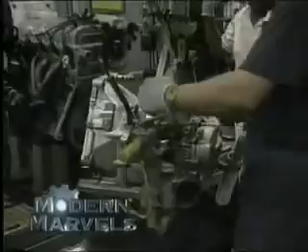Eles movimentam nossas vidas. De carros a cortadores de grama, de navios a locomotivas. Eles transformaram o mundo e nos levaram à Lua. Hoje, em Maravilhas Modernas, motores.

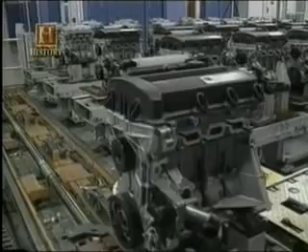Maravilhas Modernas. O motor é o grande símbolo da engenhosidade humana. Há 3 séculos, estas máquinas são a expressão definitiva de nosso desejo por excelência tecnológica. E através de muitas gerações de progressos científicos, elas tiveram um profundo efeito sobre a forma como viajamos e trabalhamos.

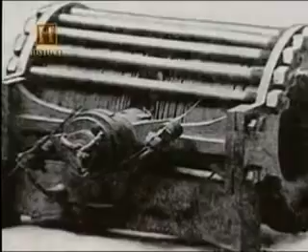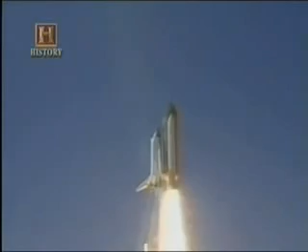Motores a vapor substituíram o cavalo. Motores elétricos e a gasolina substituíram o motor a vapor. Então, o motor a jato e o foguete levaram essa tecnologia a um nível mais alto. Agora, a microtecnologia está provando que menos é mais.

Esta marcha através dos séculos começou quando o motor a vapor deu início à Revolução Industrial. Ele libertou a humanidade da dependência de fontes primárias de energia, como o vento, a água e a tração animal. Motores a vapor movimentavam máquinas, trens, navios, tratores e automóveis.

Before steam, mostly we used animals as our mode of transportation. When steam came along, of course, we can move more material faster and more reliably than we could with animals. And so that was a big transformation. People became less tied to being in small cities. They could live out in the farm and still be connected, if you will, to the cities.

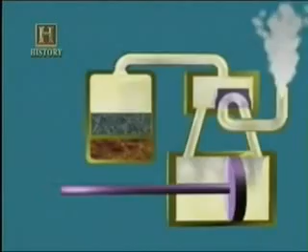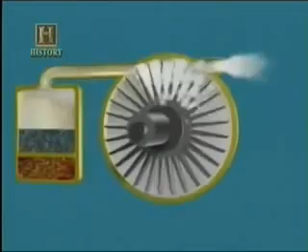Em um motor de pistão a vapor, o vapor entra em um cilindro e empurra o pistão. Depois entra pela outra ponta, empurrando-o de volta. O vapor vem de uma caldeira, um recipiente com água que é aquecido pela queima de combustíveis como madeira, carvão, petróleo ou gás natural. Um motor de turbina a vapor é como um moinho, mas as pás são giradas por vapor pressurizado e não pelo vento.

Até hoje, turbinas a vapor são muito usadas. Na verdade, elas geram a maior parte da nossa eletricidade.

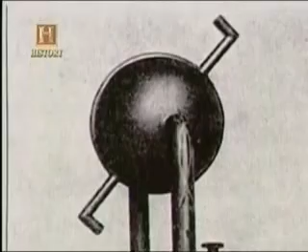O cientista grego Heron, de Alexandria, construiu o primeiro motor a vapor há cerca de 2000 anos. Era apenas uma bola de metal com 2 bicos, parecidos com os de uma chaleira. Quando o vapor era inserido na bola, ela girava. Heron o colocou em exibição no Serapeum, um museu de Alexandria, onde entreteve visitantes por anos, embora fosse considerado apenas um brinquedo interessante.

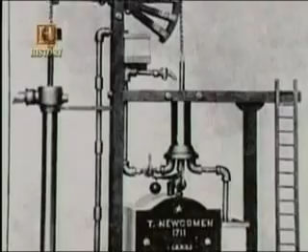Em 1705, 2 engenheiros ingleses, Thomas Savery e Thomas Newcomen, produziram um grande motor a vapor usado para drenar minas de carvão inundadas. O motor usava um pistão que se movimentava dentro de um tubo chamado de cilindro.

These early engines didn't have the gearing that could convert reciprocal motion into circular machine driving motion. That didn't happen until the 1770s when James Watt developed what is probably the most famous steam engine of the 18th century.

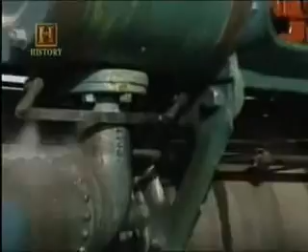James Watt, um professor da Universidade de Glasgow, aprimorou o motor a vapor, tornando-o mais eficiente na movimentação de máquinas. Seu regulador com bolas giratórias se expandia com o aumento da velocidade. A força centrífuga separava as bolas de ferro, fechando uma válvula e reduzindo a velocidade do motor.

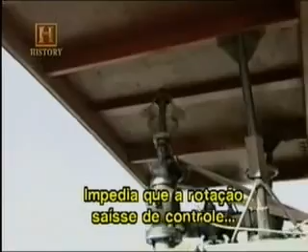And as it spread out, it would control the movement of steam into the cylinder. And that was a very efficient device to keep it from revving out of control, but more importantly, to keep it in a steady, regular, uniform motion.

Em 1800, havia mais de 1.500 motores a vapor funcionando na Europa e nos Estados Unidos. Além de drenar água das minas, também movimentavam máquinas nas fábricas.

Britain was the first nation in the West and in the world really to become industrialized, and so much of what was going on there was built around the advent of steam power.

Em 1830, navios a vapor atravessavam o Atlântico regularmente. Os primeiros navios a vapor não eram muito diferentes dos veleiros da época. Ainda possuíam mastros e velas, mas a grande diferença era a roda de pás no meio do casco. Girada por um motor a vapor, ela fornecia energia extra para o navio.

Both steamboats, then later railroads, dramatically shortened the time that people could traverse long distances. The American politician John C. Calhoun often used the expression about conquering space. And basically that's what these machines did, was that they helped to conquer space. They shortened distances between two places.

Isso era ainda mais verdadeiro no caso das locomotivas que cruzavam o oeste americano no século XIX.

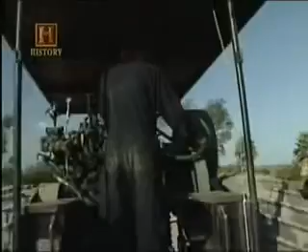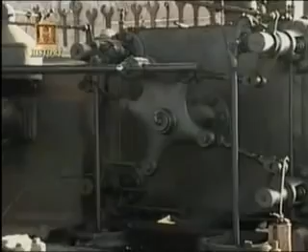Em meados do século XIX, um americano chamado George Corliss desenvolveu o motor a vapor mais importante desde James Watt. Seu novo sistema regulador permitia que o motor funcionasse com mais constância, tornando-o ideal para a indústria têxtil.

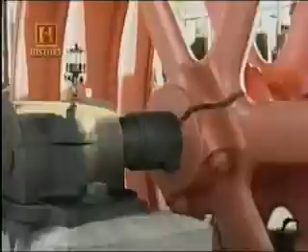O enorme volante pesa 9.500 quilos e o motor inteiro tem 45 toneladas. Este motor de 300 cavalos funcionou até 1978, quando a fábrica de açúcar Holly, em Santa Ana, foi demolida.

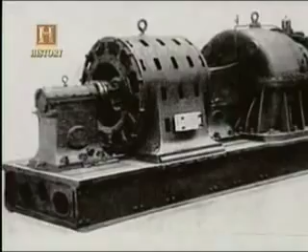Um novo tipo de motor a vapor, sem pistões, foi criado no fim do século XIX por 2 engenheiros, o inglês Charles Parsons e o sueco Carl de Laval. É o único motor a vapor amplamente utilizado nos dias de hoje. A turbina a vapor, que usa vapor pressurizado para girar as pás de um rotor, é mais compacta do que o motor de pistão e suporta temperaturas mais altas e maior expansão do vapor. Isso significa mais potência. No início do século XX, muitos transatlânticos eram movidos a turbina.

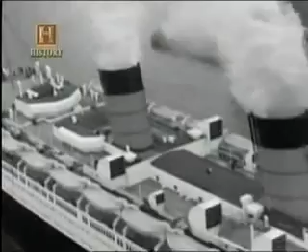Em 1920, ela havia eliminado o motor de pistão nas embarcações maiores. Todos os grandes navios, do Queen Mary de 1934 ao United States de 1951, eram movidos por turbinas a vapor. Hoje, os porta-aviões e submarinos da Marinha Americana possuem turbinas de vapor nuclear.

A TV a que você está assistindo agora também deve funcionar graças ao vapor, já que a maioria das usinas elétricas usa turbinas, incluindo as usinas nucleares como esta.

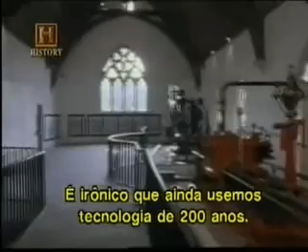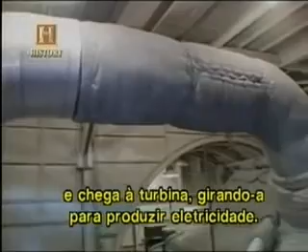As turbinas vieram para ficar, mas os motores de pistão a vapor são coisa do passado. Eles não são fabricados nos Estados Unidos desde os anos 50. Mas o som dos pistões ainda pode ser ouvido no Museu de Motores Antigos em Vista, Califórnia, próxima a San Diego, onde há dezenas de motores em funcionamento.

Em sua época, foram imagens marcantes de poder sem precedentes, mas possuíam graves falhas que transformaram esses monstros em dinossauros.

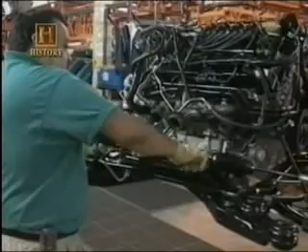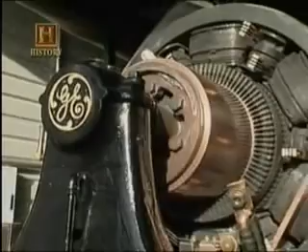Antes da criação do motor de combustão interna, surgiu uma nova máquina para nos ajudar a movimentar o mundo, e ela não queimava combustível. A seguir, o motor elétrico conquista seu lugar entre os motores.

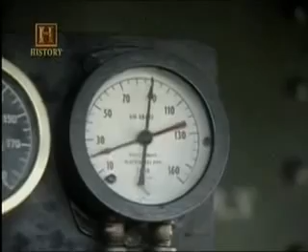Para gerar energia, as caldeiras continham vapor altamente pressurizado e nem sempre aguentavam a pressão. There were a lot of problems in the 19th century with the explosion of boilers. Before you know it, you'd have an explosion that could kill everyone.

Robert Stirling, um pastor escocês do início do século XIX, estava cansado de ver seus paroquianos sendo mortos pela explosão de caldeiras. Então decidiu fazer algo. Part inventor, part preacher, 100% Renaissance man. He was an incredible guy.

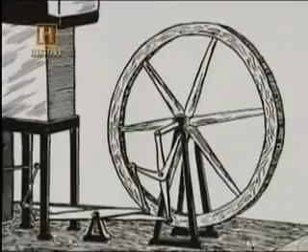Stirling criou um novo motor em 1816 que chamou de motor de ar quente. Hoje é conhecido como motor Stirling. The Stirling engines that he developed were low-pressure engines. And so there was nothing really in there that was high pressure that could explode even if the machine failed.

Stirling engines are engines that heat one side of the engine and cool the other side. There's a mechanism inside the engine that moves the air back and forth between the hot side and the cold side. When the air is on the hot side, it expands and pushes up on a piston. And when the air is on the cold side, it contracts and pulls down on a piston.

Mas a invenção de Stirling tinha um problema. Os metais do século XIX não eram resistentes ao calor e o motor Stirling não era durável. The metals didn't stand up to the high temperature continuous flame. The boiler is the part of the steam engine that is exposed to a continuous flame. In a Stirling engine, it's the hot cylinder of the engine, so it's a different part of the engine.

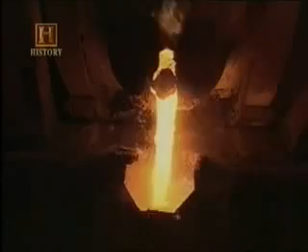Mas com a metalurgia moderna, alguns acreditam que o motor Stirling pode ser viável. Brent Van Arsdale fabrica motores de demonstração que exibem as capacidades únicas da invenção de Stirling. Um deles funciona com o ar quente de uma xícara de café e, surpreendentemente, também funciona com o ar frio de uma tigela de gelo. Tudo de que precisa é uma diferença de temperatura.

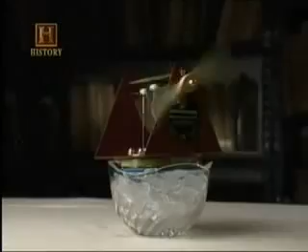All you've got to do is keep one side hot and the other side cold. You can do that any place that you can keep the temperature difference. These things will run. Este motor funciona com o calor da palma da mão.

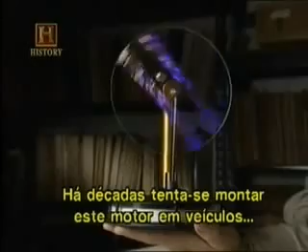Now, over the decades, people have tried to put Stirling engines in vehicles, and the conclusion right now is no. It's an expensive engine, much more expensive than alternatives like gasoline or diesel engines. And it's very hard to make it efficient on a vehicle because the way the engine is running changes all the time. As you and I drive, we speed up, we slow down, we accelerate. That makes it hard for the engine to stay efficient all the time, especially hard for the Stirling engine.

Os motores a vapor e os motores Stirling logo encontrariam um competidor para alimentar a revolução industrial. E hoje esse competidor continua conosco. Não temos motores a vapor em nossas casas, mas temos muitos motores elétricos. Dê uma olhada ao redor. Relógios elétricos, refrigeradores, aparelhos de som, videocassetes, ventiladores, aspiradores de pó, liquidificadores e, é claro, a escova de dentes elétrica. Todos possuem motores elétricos.

Without it, we wouldn't even be able to sit here and make this interview. It wouldn't be worth getting out of bed unless you wanted to be back in the horse and buggy days.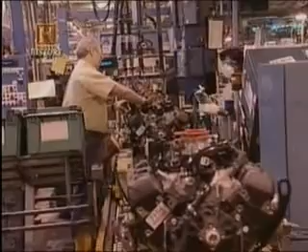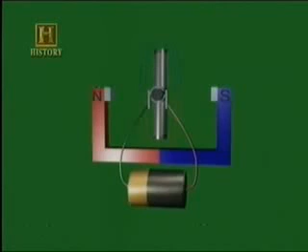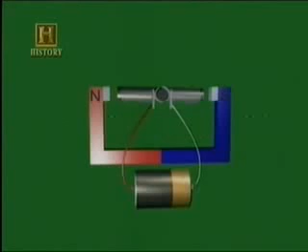Ao contrário dos outros motores que usam combustão para gerar calor, o motor elétrico possui um princípio totalmente diferente. Quando a eletricidade passa por um fio, um campo eletromagnético é criado. Ou seja, o fio se transforma em um ímã. Ao interromper a corrente, o ímã é desligado. Ao inverter o fluxo de energia, seus polos são trocados. O motor elétrico faz isso repetidas vezes, gerando movimento.

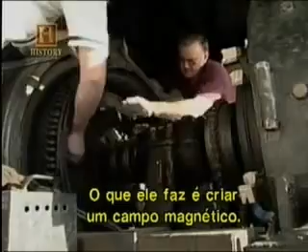What it does is it creates a magnetic field. And it actually drives it, just like Doug and I are doing. As the power is going through this field, this is a magnetic field and it's revolving around here and it's sucking this around. Obviamente, os motores elétricos precisam de eletricidade, então sua história começa com as primeiras experiências elétricas.

Em 1837, Thomas Davenport patenteou o motor de corrente direta, ou DC. Em 1888, Nikola Tesla patenteou o motor de corrente alternada, ou AC. Hoje, usamos os dois. Se funciona com pilhas, é um motor DC. Se é ligado na parede, é um motor AC.

Tesla was the first one who introduced the concept of alternating current, where you would change the polarity back and forth 60 times or 50 times a second. And Edison didn't believe in that. Edison actually fired Tesla, and he went to work for George Westinghouse. Tesla was right. Alternating current could be transmitted over miles and miles, and there were significant limitations for direct current transmission and distribution systems.

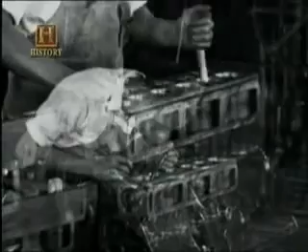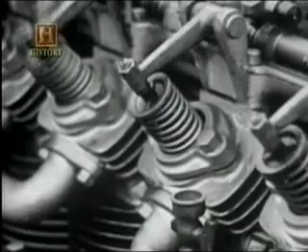Up until that time, you had to crank an engine to get it started, and it was not only difficult but dangerous. It could really break bones in your arm. If one of those things jerked back on you, you could really hurt yourself. But with the electric starter, that changed the whole ball game and immediately signaled the demise of both the electric automobile and the steam-powered automobile.

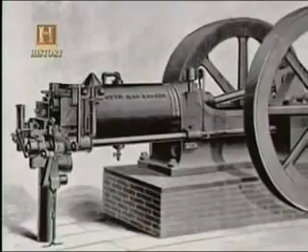We're still using that same 4-stroke cycle, and roughly our arrangement, we've got a piston in a cylinder, we've got a connecting rod, and we've got a crank as our simple mechanism for converting the up and down piston motion to rotation of a drive shaft. That's what he came up with, and we're still using that today, 150 years later.

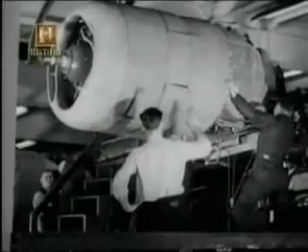Since we were relying on piston engine aircraft for our fighters and bombers, the automobile industry converted its engine production facilities to producing engines for these applications, and the new car production went down to very low numbers.

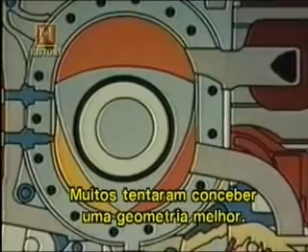Many people over time have tried to think of a better geometry. There are some negatives to this simple piston connecting rod cylinder arrangement. Masses move up and down, and that's hard to prevent that causing vibration. But so far, with the one exception of the Wankel, nobody's invented a geometry that's got into real-world production.

This roughly triangular-shaped rotor sort of moves around inside a container, but not quite symmetrically. It's off-center. And so as it rotates this triangular rotor, it creates sort of smaller volumes and larger volumes in a similar way to the piston moving up and down in a standard engine cylinder.

I have a very strong attachment to the rotary engine, without any questions. Kobi Kobayakawa, recently retired, directed the project of the rotary engine car RX-7 at Mazda.

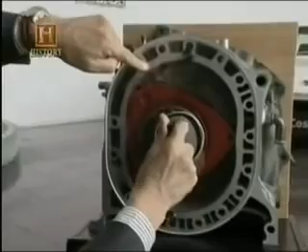This is the only moving part of the rotary engine, and we don't have any intake or exhaust valve or camshaft. Basically, we have only two moving parts, two rotors. In the case of a V6 engine, the moving parts like pistons and connecting rod and valves and camshaft, maybe 50 moving parts.

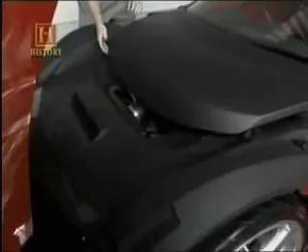Ele pode parecer pequeno, mas seu motor de 255 cavalos pode competir com motores a pistão muito maiores. Atualmente é o único motor produzido em massa que não possui pistões.

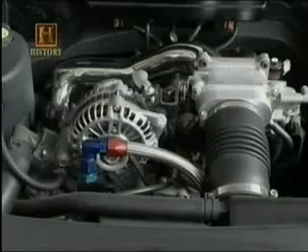Kobi conversou com Felix Wankel pouco antes da morte do inventor em 88.

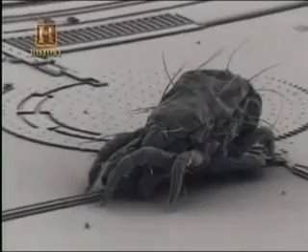Felix Wankel ficaria orgulhoso em saber que sua ideia radical, concebida em 1924, continua girando. A seguir, pequenos motores que fazem um ácaro parecer um monstro. É a microtecnologia, o próximo passo da evolução dos motores.

1941. O mundo estava em guerra. E era a vez de um novo tipo de motor deixar sua marca: o motor a jato.

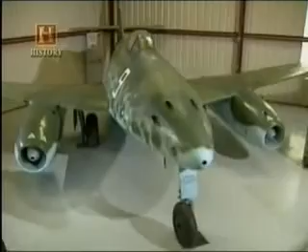Tudo começou há 60 anos, quando a Inglaterra e a Alemanha competiam para desenvolver o primeiro avião a jato. Em 1941, a Alemanha saiu na frente com um protótipo de caça, o HE-280. Um ano depois, os alemães tinham um caça a jato ainda melhor, o ME-262. Ele foi o primeiro avião a jato a ser produzido em massa. O primeiro jato britânico, o Gloster Meteor, de 2 motores, foi testado pela primeira vez em março de 43.

Desde então evoluímos muito. A indústria Airbus está desenvolvendo o Super Jumbo. É um avião de 2 andares, 50% maior do que um Boeing 747 e capaz de transportar até 700 passageiros.

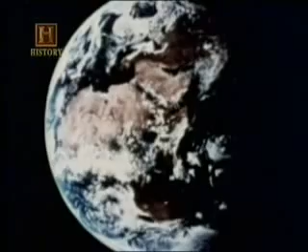No início, os motores a foguete e a jato eram muito próximos e quase não havia distinção entre eles. Um foguete é parecido com um jato, mas carrega seu próprio suprimento de oxigênio para gerar combustão. Os jatos sugam o oxigênio do ar, os foguetes dos tanques de oxigênio anexados. Isso quer dizer que um foguete pode viajar pelo espaço onde não há oxigênio.

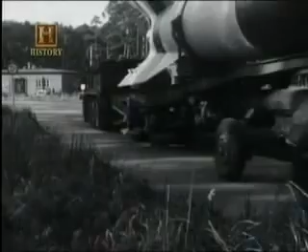As experiências do americano Robert Goddard com foguetes dos anos 30 foram seguidas pelos testes de Werner von Braun na Alemanha nazista, que levaram à criação dos foguetes V2.

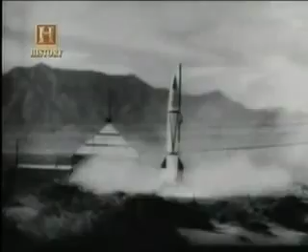A tecnologia criada por Goddard e von Braun permitiu façanhas como o rompimento da barreira do som por Chuck Yeager em 47, o lançamento do Sputnik em 57 e a viagem da Apollo 11 à Lua em 69.

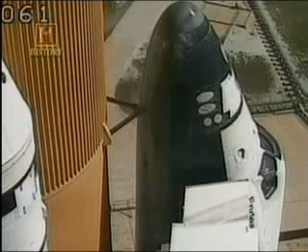Hoje, os 3 foguetes que movimentam o ônibus espacial produzem um impulso de 37 milhões de cavalos, o equivalente a 23 represas Hoover.

Juntos, eles consomem 240 mil litros de hidrogênio líquido por minuto. Os motores são móveis e usados para manobrar a nave durante o voo. Eles também fornecem um impulso adicional para a decolagem, somando-se a 2 enormes foguetes que são descartados durante o voo.

Há décadas, os avanços tecnológicos vêm trazendo motores maiores. Mas uma das áreas mais promissoras envolve a criação de motores pequenos, que cabem na ponta de um dedo.

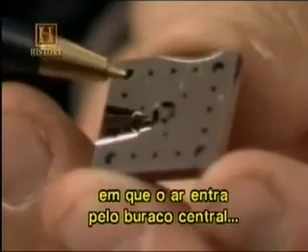This would be a turbine engine. Air would come in through the center hole, and then fuel would be injected through a variety of these ports located here. The air and fuel would mix after going across a compressor, enter a combustion volume that's in a circular region that surrounds this, and then go across a set of turbine blades and be exhausted out through this port here. Inside of that lamination is this little disc, and that's a disk that'll spin at 1.5 million RPM.

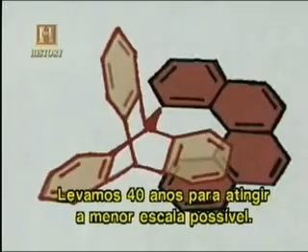The original design, of course much smaller than this, had 2 parts: something that was going to rotate that looks like a gear, has 3 blades on it, and something else that was going to function like the pawl on a ratchet. And it was supposed to rotate like this.

Each corner represents a carbon atom with a hydrogen atom on it. It's connected to the next corner by a bond between 2 carbon atoms. Next corner, another bond between 2 carbon atoms. And because of the laws of chemistry, one can predict how long the distances are going to be and what the geometries are going to be.

Embora não possa vê-lo, Kelly sabe que criou uma única molécula cujos átomos funcionam como um motor. Ele levou 4 anos para desenvolver sua molécula motor. Mas hoje, ela pode ser produzida em lotes, grandes lotes.

I think this will have an enormous impact. Being able to manipulate things at the micro and nano level enables us to build a nearly limitless number of devices and systems,

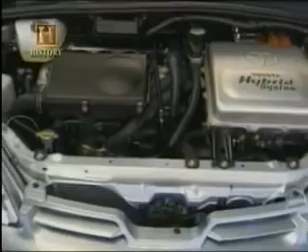Híbridos, vistos por alguns como o futuro dos automóveis, eles são movidos por um motor a gasolina e um motor elétrico. Em híbridos como o Prius, lançado pela Toyota em 1997, os motores podem movimentar o carro juntos ou separados.

Para reduzir as emissões, o motor elétrico é usado para levar o veículo até 24 km por hora. Então o motor a gasolina assume.

Carros elétricos não produzem poluição, mas o problema é que precisam ser recarregados. Os híbridos oferecem algumas das vantagens do carro elétrico, mas você nunca precisa ligá-los na tomada. Os híbridos recarregam suas próprias baterias enquanto andam.

It's actually regenerating and putting energy from the tire through the motor back into the battery pack.

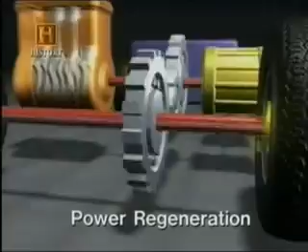Com o freio regenerativo, o carro desacelera usando o motor elétrico como gerador. Isso gera resistência na corrente e carrega a bateria. Em outras palavras, ao agir como freio, o gerador elétrico cria energia, ao invés de gastá-la na forma de calor, como em um freio comum.

As we turn the corner here, initial acceleration is motor, and as I step into the throttle, the engine starts. Green is charge, red is power. As I lift off the throttle, engine shuts off. The energy flow is from the tires through the motor back into the battery pack.

A Honda, concorrente da Toyota, colocou no mercado o seu híbrido, o Insight, em 2000. Ambos são vendidos por cerca de $20 mil. No Japão, mais de 34 mil híbridos foram vendidos desde 1997.

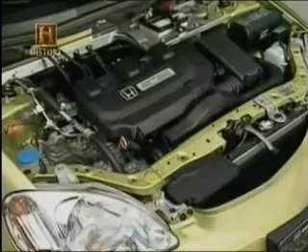They're more expensive because you've got a battery and a motor to add to the engine that you're already paying for. And the benefits depend on the kind of driving these vehicles go through.

So, for example, in Japan, they roughly double the fuel economy because it's very congested, slow-speed driving, lots of stopping and starting. When we come to the kind of driving we have in North America, less congested, we drive at higher speeds, longer distances, then the hybrid's not as attractive.

Os trens usam o conceito híbrido há anos. As locomotivas a diesel são, na verdade, híbridos elétricos, com um poderoso motor a diesel gerando eletricidade para os motores que giram as rodas. Mas os híbridos não são a única esperança para o futuro dos automóveis.

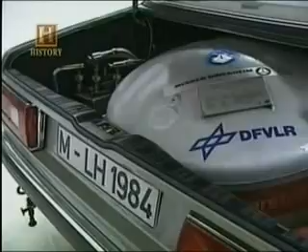Há também o hidrogênio. Em 2000, a BMW lançou o primeiro carro de linha movido a hidrogênio ou gasolina. Trocar o combustível por hidrogênio é como desligar a poluição. A única coisa que sai pelo escapamento é vapor d'água. Mas o hidrogênio tem um preço.

Critical question is then, all right, if you want hydrogen, where do you get it from? Well, the most economic way now is to make hydrogen from natural gas. Natural gas has got carbon in it, so in producing hydrogen, we release the carbon into the atmosphere. That doesn't really help with the greenhouse gas problem.

If we made hydrogen from nuclear power or perhaps solar energies, maybe we could find an economic way to do that would let us produce hydrogen without releasing any carbon dioxide.

Dos motores a vapor aos motores não poluentes. Do pistão à turbina, a história da tecnologia dos motores é uma jornada compensadora. Uma viagem através do panteão das maiores conquistas do homem. Desde que Hero construiu o primeiro motor a vapor na Grécia Antiga, o fascínio humano pelos motores só tem aumentado.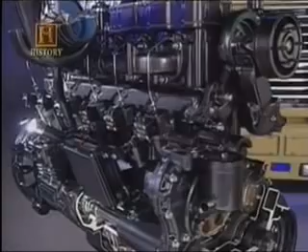I did it because I thought it would be neat, mostly. And I wasn't terribly worried about applications.

Sem dúvida, este fascínio nos manterá conectados ao futuro e alimentará nossa habilidade de mudar o mundo, sempre inventando novos tipos de motores, mesmo que não saibamos ao certo para que servem.